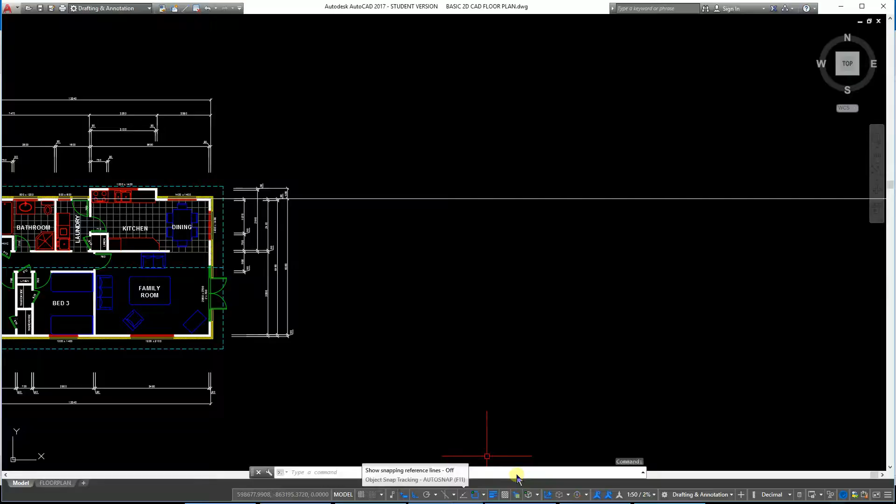Out of here and into this one here, basic. This one here. No. Let's get our screen back on. And this one. No, this one. That's the one. That's the one. Okay, so here we are. We're ready to do this.

So what I've done is a bit of research back through the plans, to establish a few lines. We're going to use a cross-section line and get things out of the way. So I'm going to draw a cross-section line and a horizontal one, and just put that in there.

And that one there, that's going to be the ground level. Now the minimum height above ground level for finished floor level is 150 mils, so I'm going to offset that by...

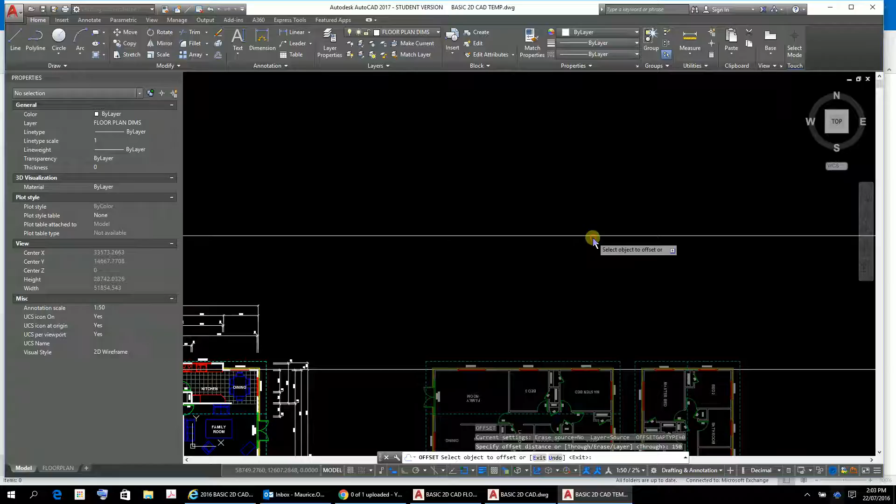150... 150, enter, and I'm going to put that in there. So if we measure that there with a line, we'll see that should be 150 mils.

So that one there is ground level, and on top of that we have finished floor level, FFL. Now what we have above that then is the top of the truss level, which is shown...

2445. So offset, enter, 2445. It's important that you check these measurements as they are critical, obviously, in the sense that if you get them wrong, you've got a significant amount of work.

So that's finished floor level to the underside of the truss. Okay, to the underside of the truss, which you'll see put in there at various stages. That's to the underside of the truss.

So that's the underside of the truss there, up the... oh, hang on, where is it? Did I do it from the wrong one? Oh no, there it is. So that's it, underside of the truss.

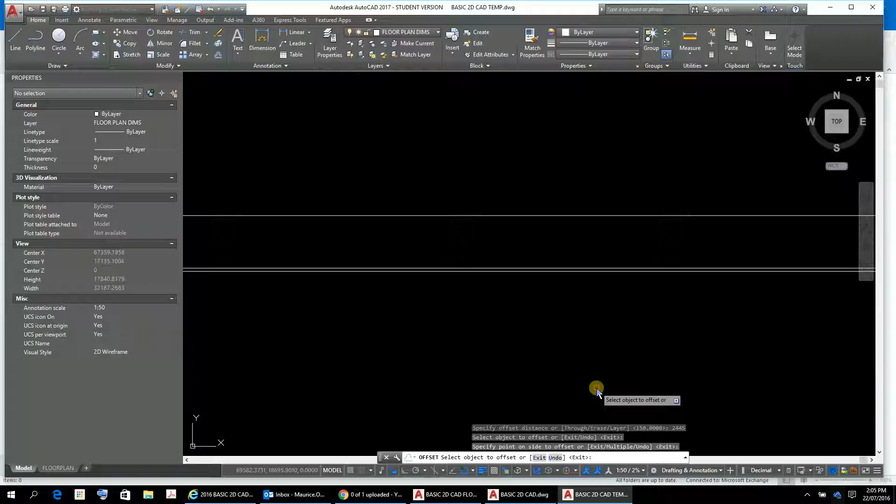Okay, so now we're going to start projecting up for each of these things. So what I'm going to do is use a ray. I think I might use a ray rather than a construction line. So you can just go up to here, go draw, and use the ray, which is just RAY. And the start point for the ray, I'm going to start there, and we need to make sure our ortho's turned on.

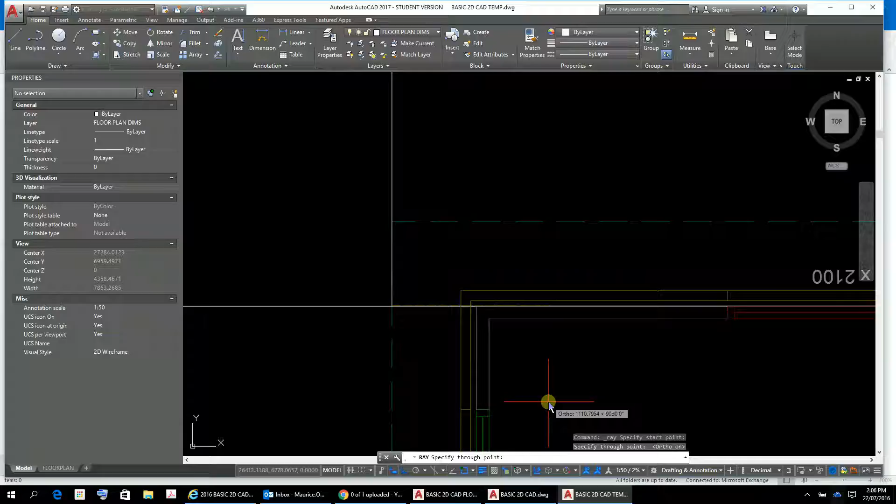So that's just projecting that point up there. That's a point that we need to project up there. Okay, and that'll give us that.

Now then we're going to project here another point here. No, so now we've got to do another — well, we can do this by just copying, it's probably best, CP, enter, and I haven't included any issues around layers just yet, so that's going to be that point there, which is going to be the edge of the brickwork there.

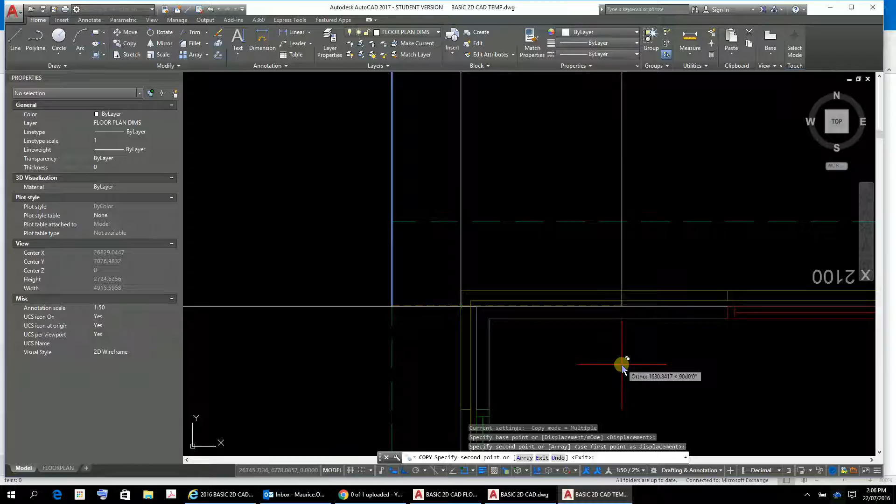And then obviously we've got a window opening here, so I'll just go with the opening there, and then we'll fit the window. So the window opening there, and another window opening here. That's probably going to be an important point.

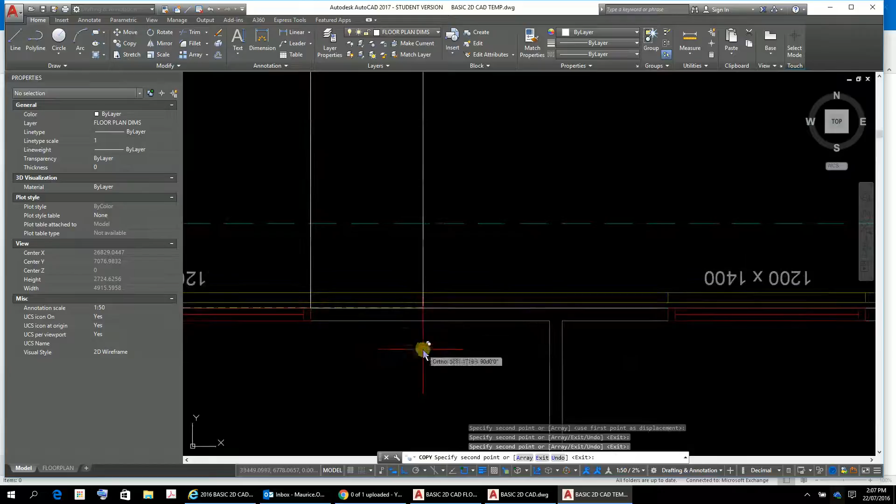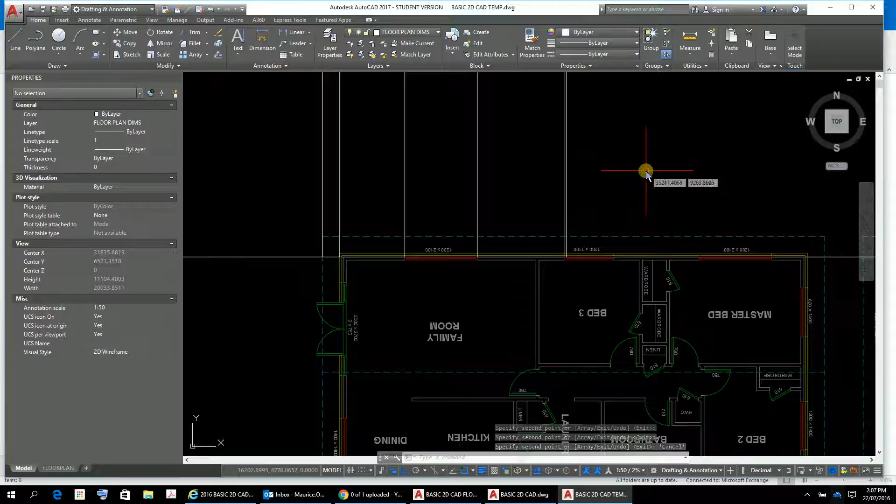Another window opening here as we work our way along, and as I work my way along I realise I've made a mistake - I should not be projecting from there, but from the bottom. So I'm going to take those out, because we should be projecting from down here, since this is what we're looking at, and we want to project from there upwards.

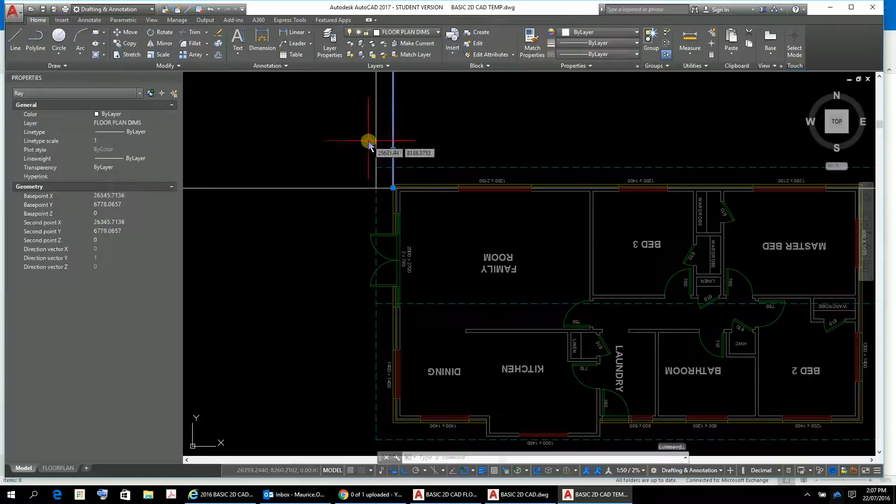So I might just move these two here for consistency. I'll move that one down to there, and now we can start to look here. Then I'm just going to copy these now - CP, enter - and start putting it in here, and this is there.

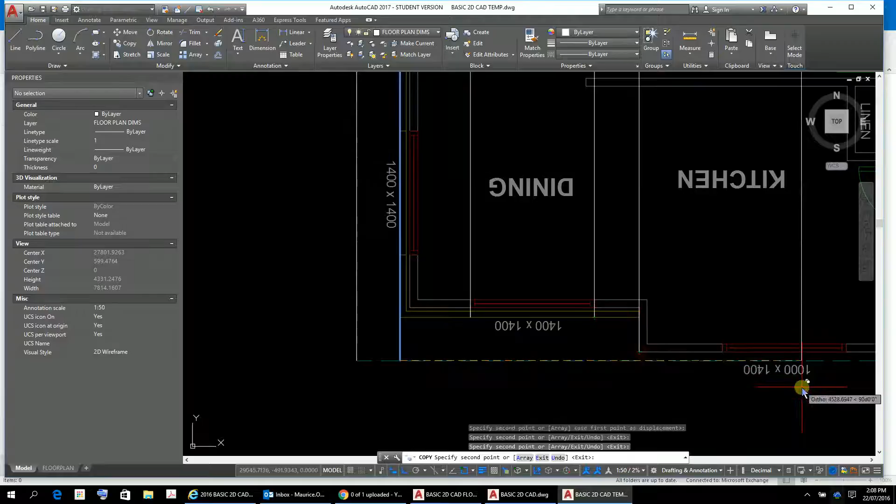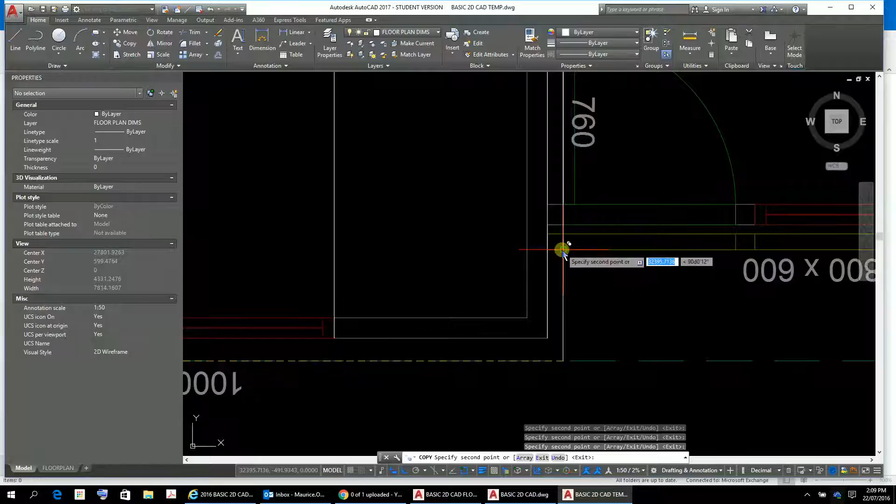So a window opening there, and then that's the little edge of that there. There's a window here, a window here, the edge of that there, and then we've got the door in here, so we've got a little bit of a door that fits in there, and then a door here, end of the door, and then the window starts.

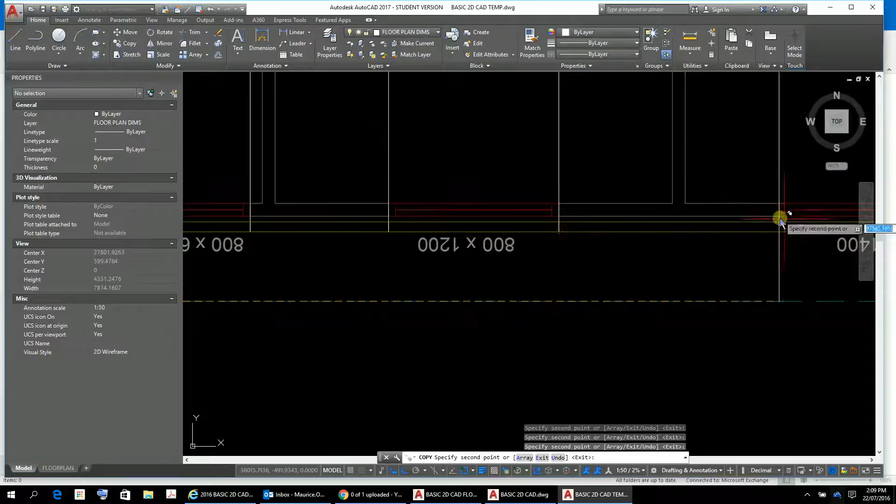So it's a door-window sort of thing going on there, and these are all projecting upwards to give those lines there. And then we've got another window here, a window here, a further window here, a further window here, edge of a building here, roof line here. So that's projecting all those up across that - what's going on there. That's all very good.

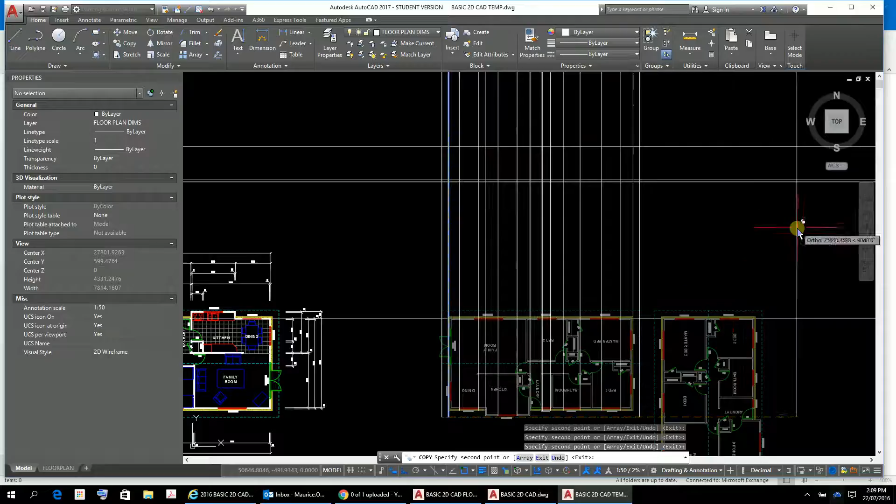And then we're going to start down here doing these ones here. So this is a ray - oops, escape. I must have lost my mojo a bit there. So, the ray - CP for copy, and that's going to be my base point.

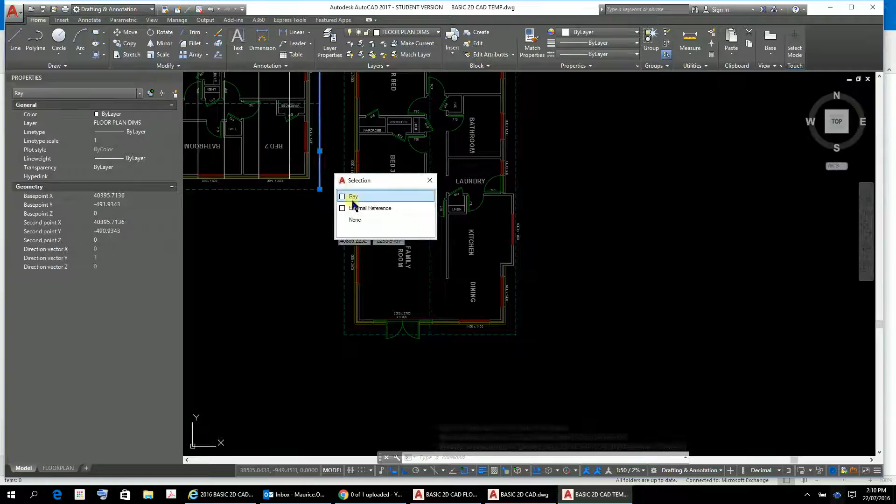You've always got to be thinking with these what the names are here. Oh, not having much success there. The ray, CP. Finally, hopefully. Oh, okay.

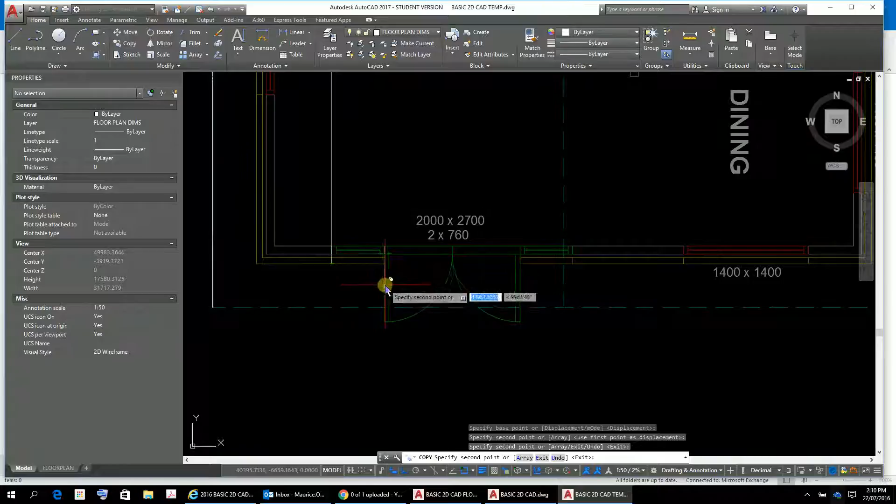So one there, then we've got windows there. I'll put this as a door line there, door line there, door line there, window there, window, window.

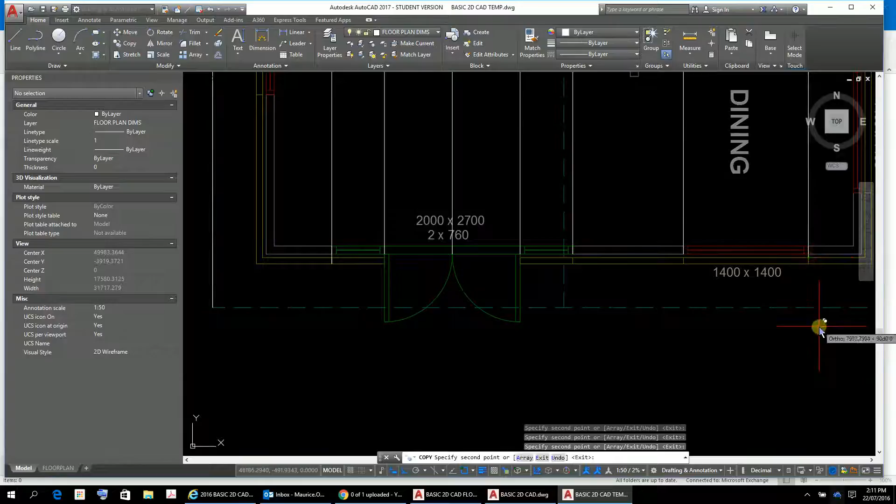And then here you'll see that line through there, and you'll also see that line through there, and you'll also see the roof line there, like so. So there they are, all up there, all projected up.

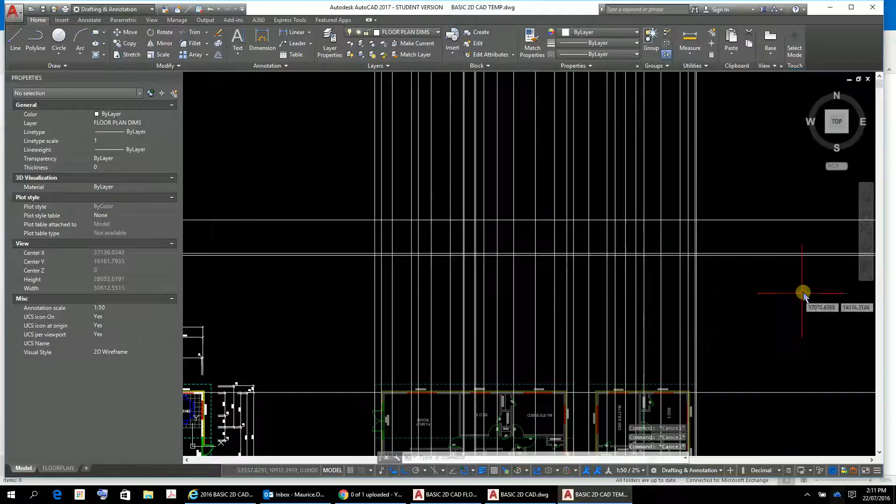I'm going to create a new layer properties, and the new layer will be created here, which is that one. Okay, and I'm going to call it elevations - onto the capital E, elevation, E-L-E-V-A-T, elevations, just for now is the thing, and we'll make that.

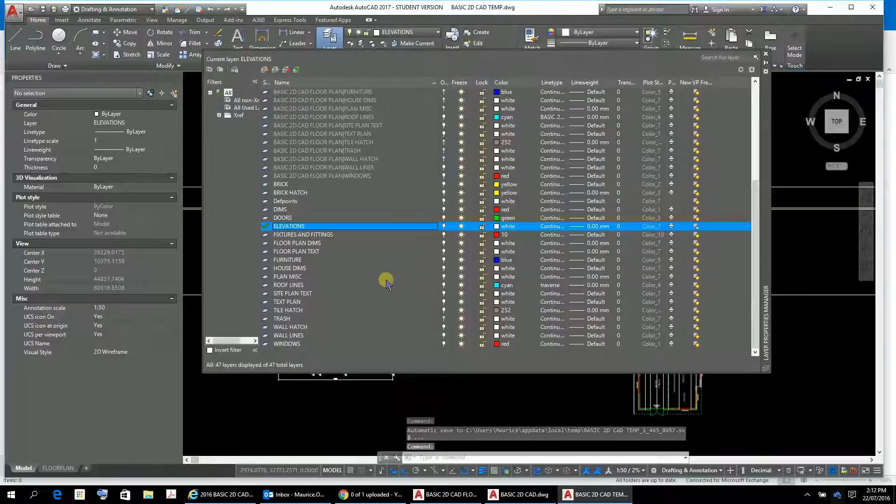Oh, I already had one - that's become layer 1. Apparently I already had an elevations layer that would have been brought in from when I perhaps copied something in from another plan that had an elevations layer in it.

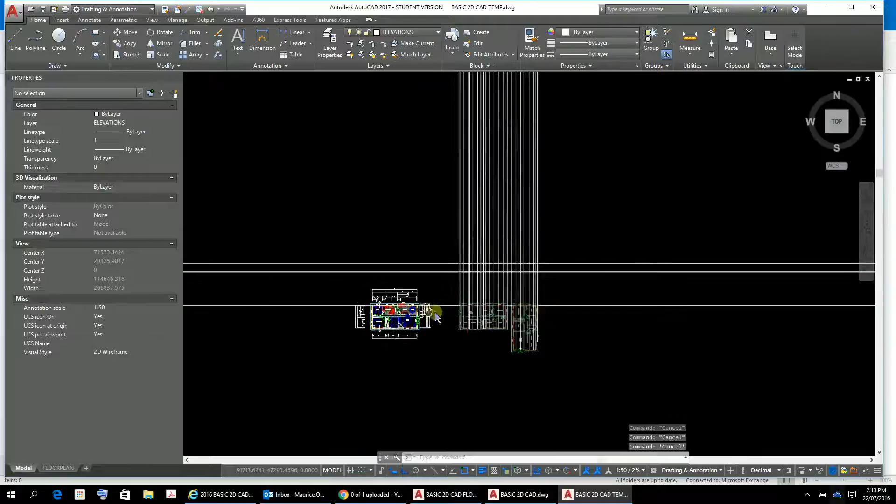So we'll use that. What we're going to do is just copy all of this stuff here, and I'm going to put that into the elevations layer - there, like that, like so. Okay, and this is our elevation here. The elevation is going to form in there. All right.